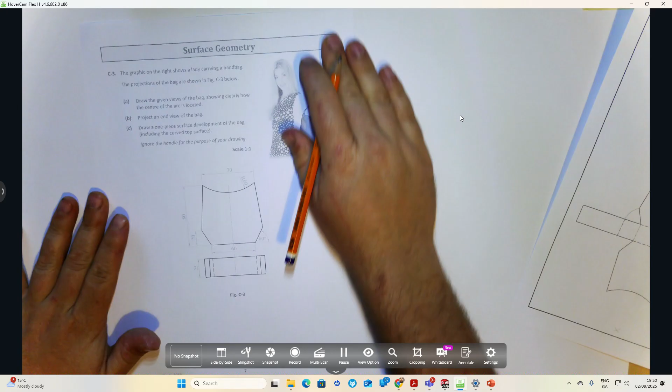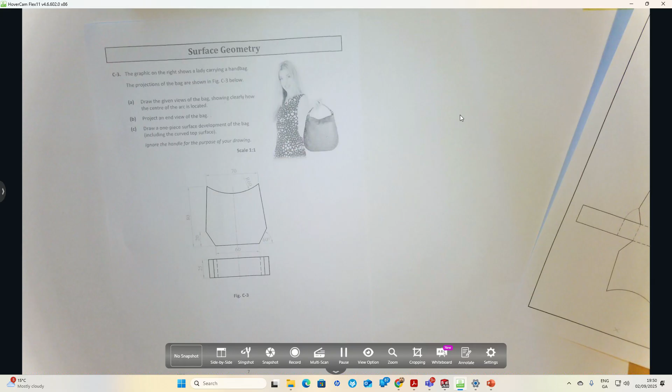Right, so we've got a handbag. Draw the projections of the bag as shown. Draw the given view of the bag showing clearly how the centre of the arcs are located. Project an end view and draw a one-piece surface development, ignoring the handle. So surface development will be folding all the faces of the bag out flat.

Elevation, plan, end elevation, and show how to find the arcs. Right, okay, so we'll begin. Now, so we'll go up here.

There, maybe there on the page. XY line. Okay, center line. Dashed line up through the middle for a center.

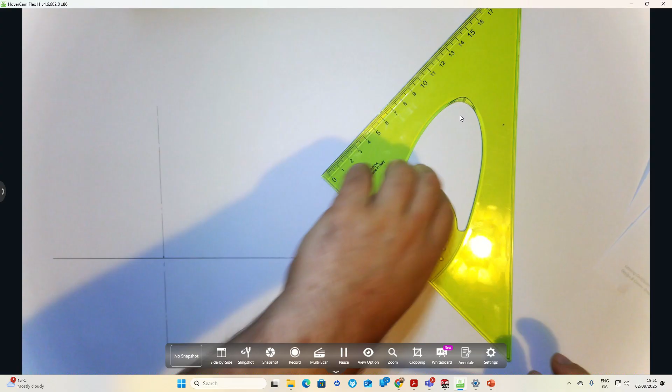Now, okay, size at the bottom is 60 in total, so 30 to the left, 30 to the right. And we can see a 70 for the top, so 35 to the left, 35 to the right.

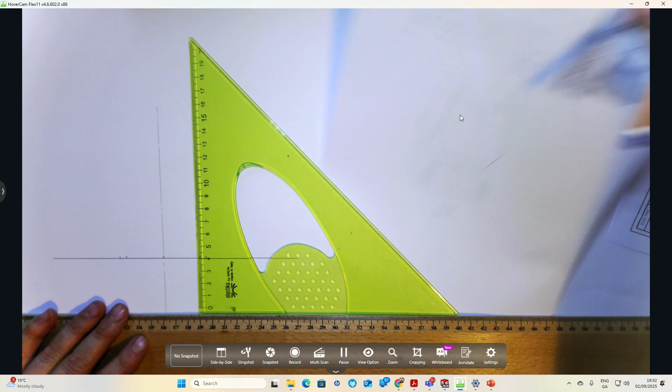We can draw lightly up here with these. Okay, 20 mil for the bottom, so 20 mil up from the XY line, then 80 up from the XY line for the top of the 60 mil arcs.

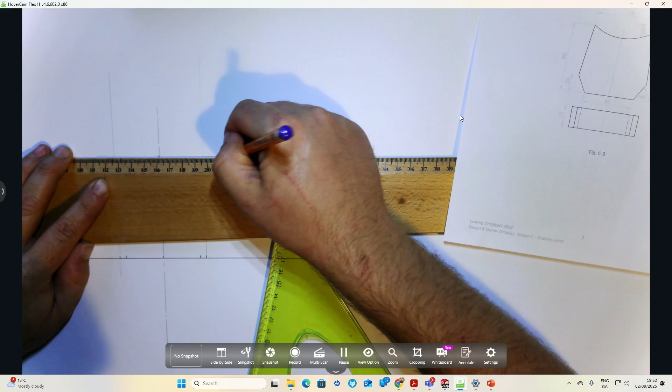So light line across, light line there. Okay, an angle of 60 degrees for the chamfers at the bottom, so an angle of 60 degrees.

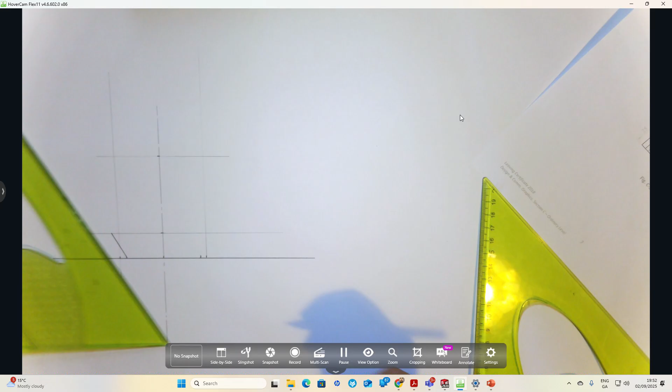So 60. Now, the radius at the top is 60 millimeters. So we've got 2 points in the circumference. So look, we've got 2 points.

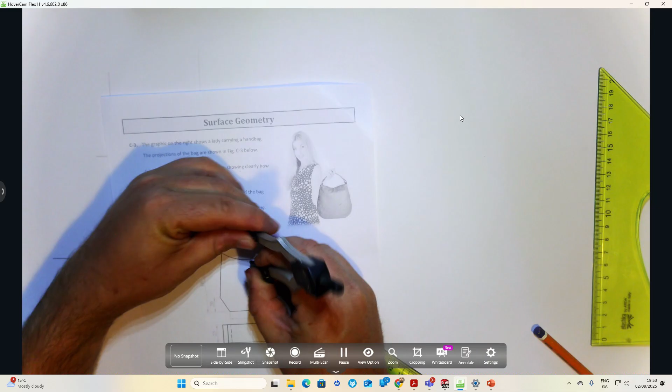So we're going to set our compass to 60 now, just judging this by eye in the question. We're going to swing 2 arcs, radius 60, from these points, and then we've got the center of the arc. So two radius 60 arcs.

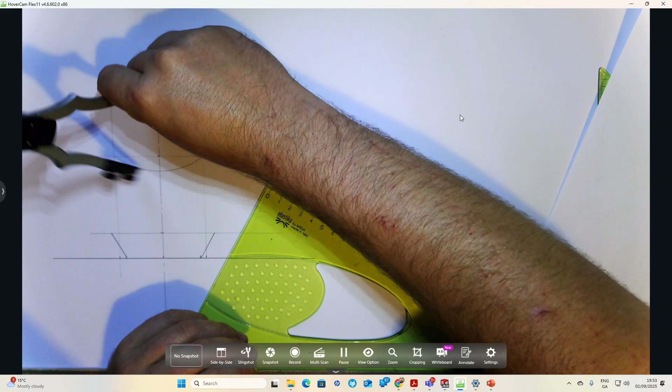So I'm setting my compass to 60 here, and I'm going to swing from this corner here, and this one here. Then we've got the center, so we can put our compass up there, and then we can swing there. Now we can connect them together.

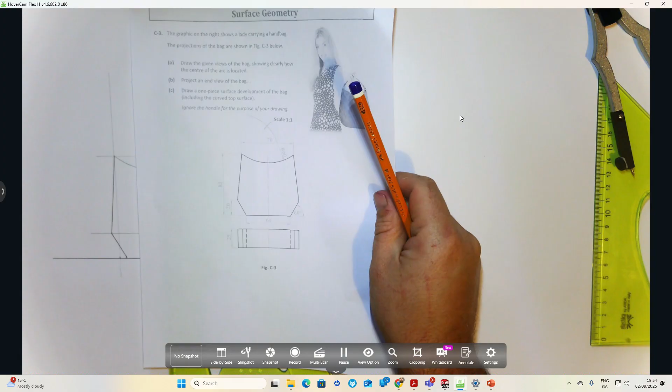Now, plan view. Okay, so we're going to go down 15 mil from the XY line. The total depth is 25, so 25 there. So we're going to project our lines down then.

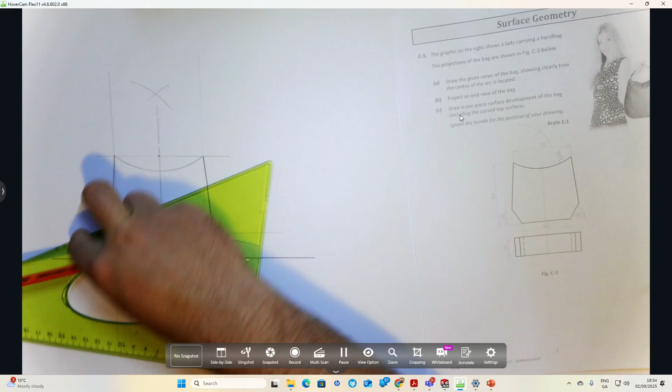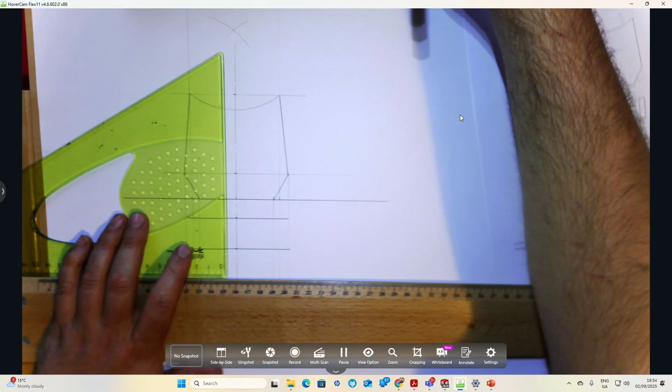Right, so we can heavy across there, across there. Now the bottom there, that's our hidden detail, so hidden detail there. Heavy detail, hidden detail, heavy detail, heavy detail. Right, we've got an end elevation to do.

So I'm going to go across 15 from the corner of the elevation. I'm going to draw a YY line here. I'll do my 45-degree line there.

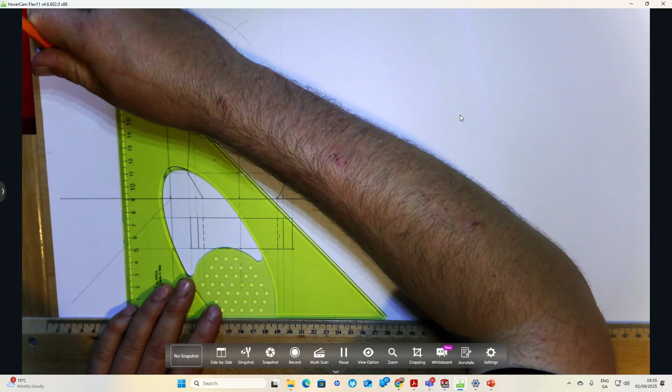I'm going to bring the 25 across to the 45-degree line. Okay, I'm going to go up then from where they hit the 45-degree line, so I'm going up. I can bring these across. So a heavy line there.

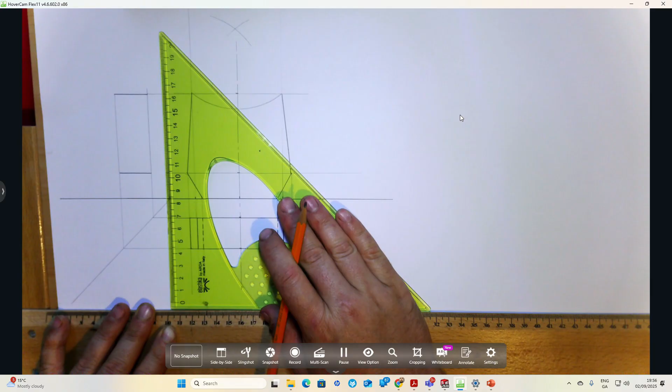Heavy line. Now, so that's part A and B done, the given views and then the elevation. So we have to do, alright, okay, a one-piece surface development, so we have to fold all the faces out.

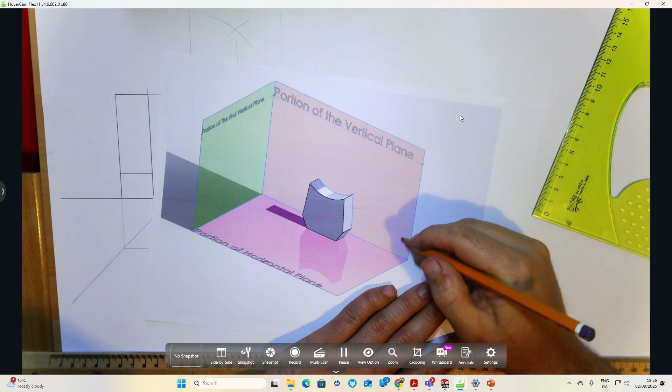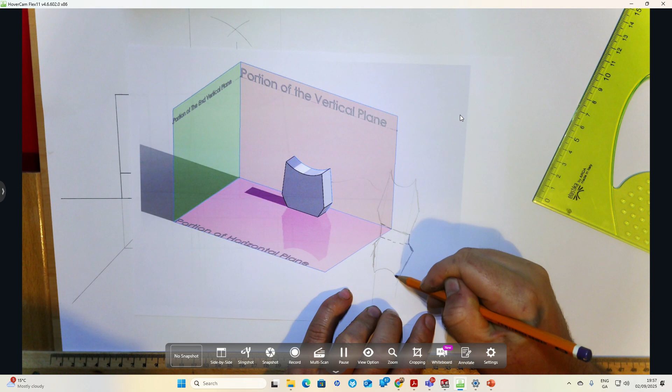So the back face is going to remain the same, then the base on it. Alright, so we have the back and the front face there, and the base. Now the sides, so you could go 1 and 2 there.

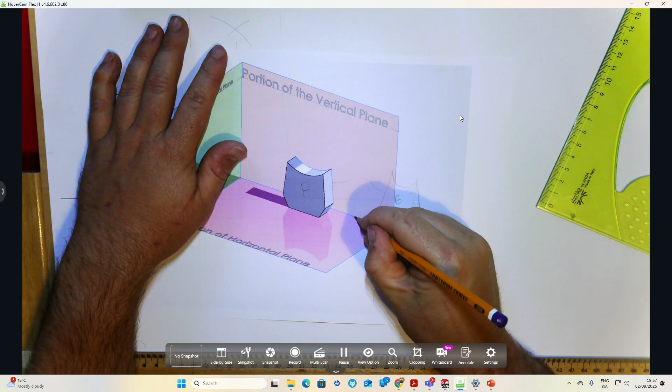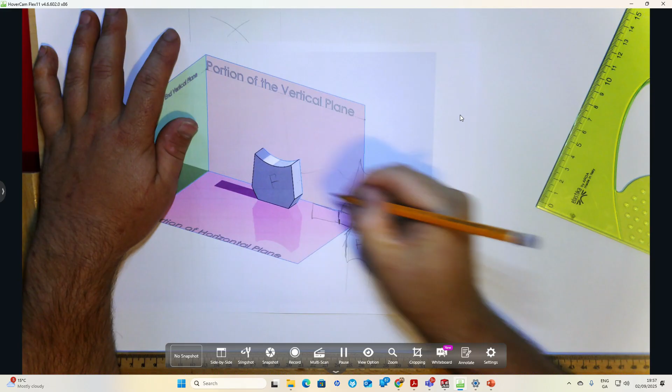So we're putting these faces here, 1, 2, and then we're going to have to divide this up into, okay, 3, to put the curved face in along here, and we'll have 3 elements on. We're going to divide it into 60, 30.

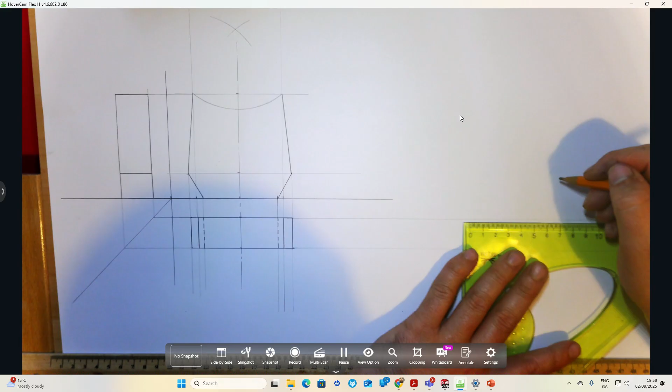So we'll get cracking. Alright, so I'm going to bring across the lines of my plan. Essentially I'm going to redraw an elevation here. So I'm going to put these in. I go out a bit, well, I'll go out a good bit to make sure I have plenty of room. Don't need to see my end elevation for a while.

Okay, so to judge the spaces, I'll be alright. I'll rub out my XY line, or rub a bit of my XY line out if I need to. So 60 millimeters, and then 30.

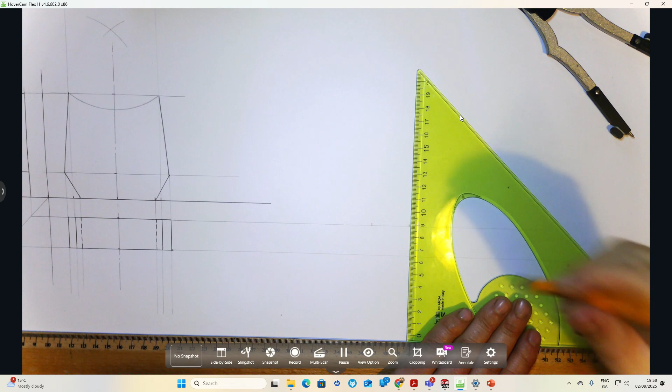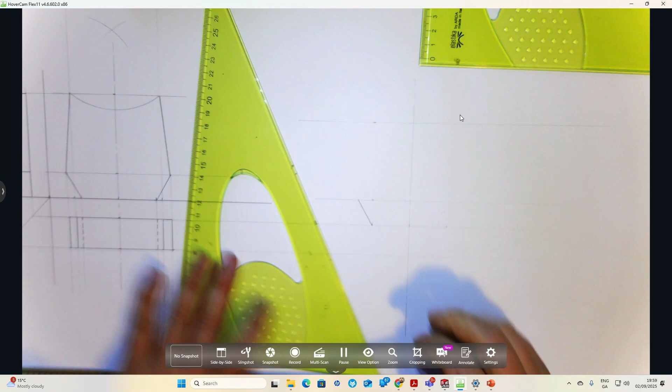Okay, so the same heights again, 20 and 80. Alright, same angles again, 60 degrees. I'm just doing light lines there for the height. So 60 degrees here. Degrees there. Now 70 up at the top.

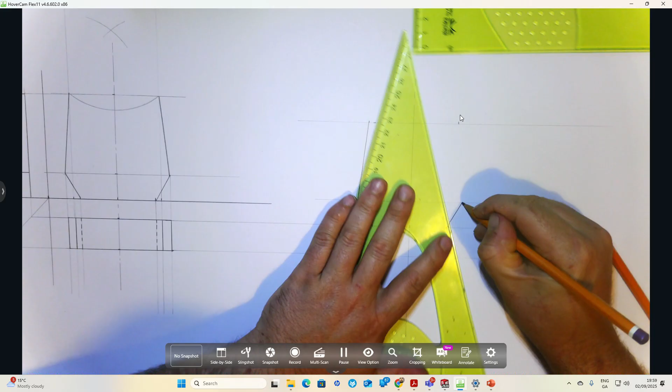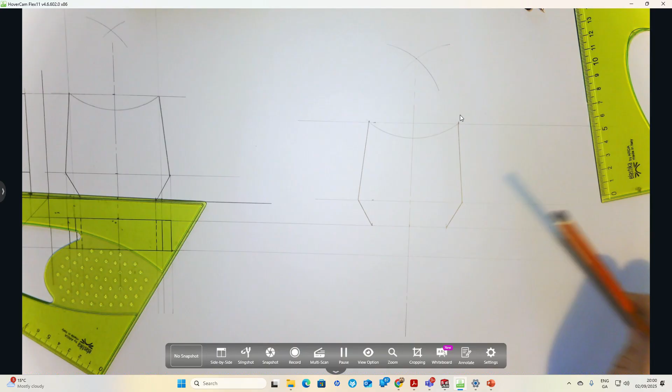Now to get the center, same strategy, so radius 60. Swing an arc up here from the left, swing one from the right, then put your compass up there. There, you can mark it in. Alright, so we're going to project that down underneath then.

So 80 is the height. This compass is set to 60. I'll move it down a bit. Here we go. So we're going to swing an arc.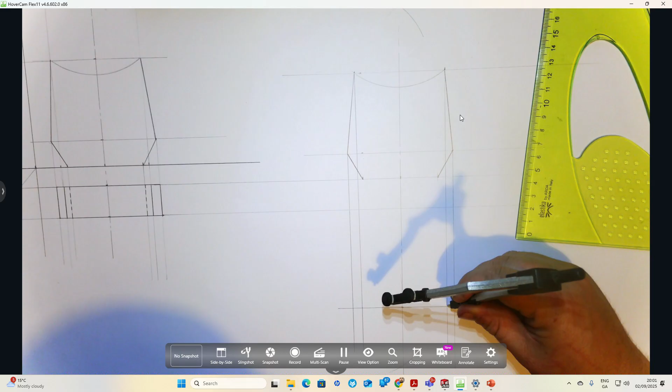Now developments is all about recognizing true lengths, and we have an awful lot of lines as true lengths because we're looking perpendicular to them now. So what was I doing there? 60 from here and 60 from this one here.

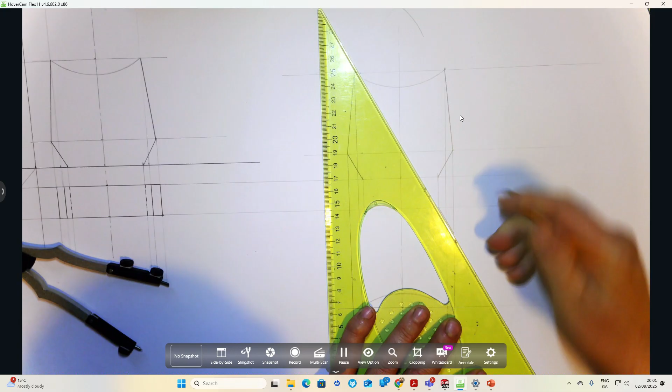There we go. Now then, 60 degrees again. And 60 again, which will get you the altitude of 20.

And we can join these together. Now we're going to fit in dash lines for fold lines.

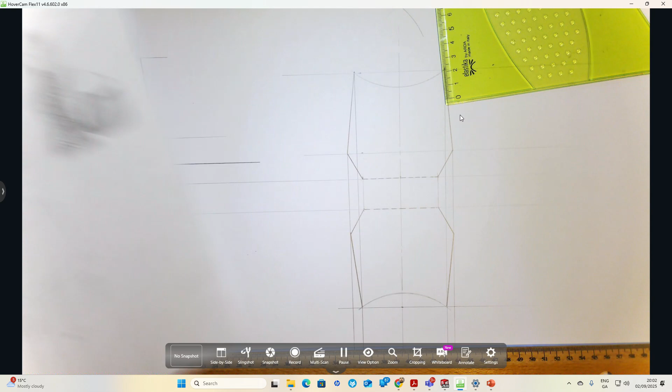Now this line here is a true length in elevation because it's parallel to the XY line in plan. So it's a true length in elevation.

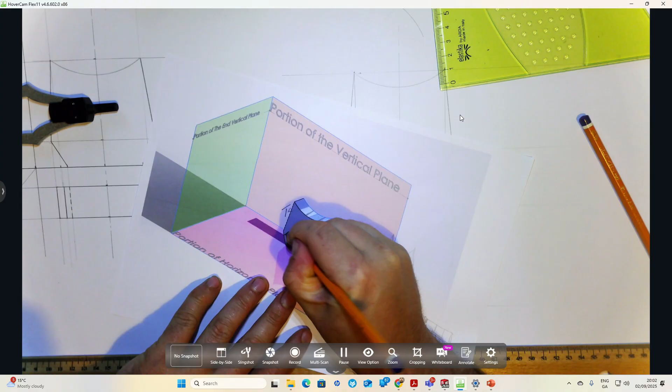So I can go up to my elevation, or I can go from here. Right, so I'm jumping the gun there. Yes, that's the true length, and I meant to do this one first. That's a true length in elevation because it's parallel to the XY line in plan.

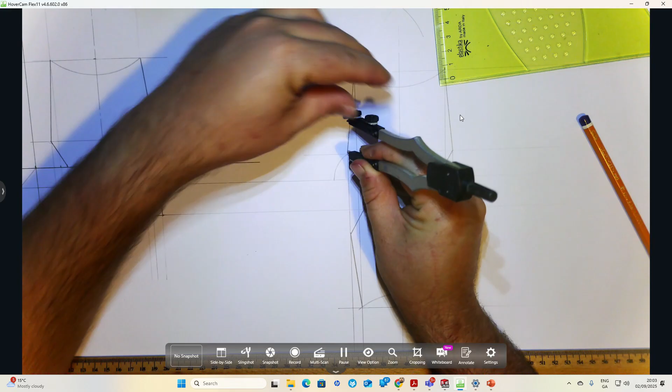I can take this distance with my compass, alright, and I can essentially just swing it down onto that there. Okay, and then I can take this distance with my compass and put it then, so I took that distance, which is the same as taking it from here, rather, and I can add that on here. Alright, now I can heavy those in.

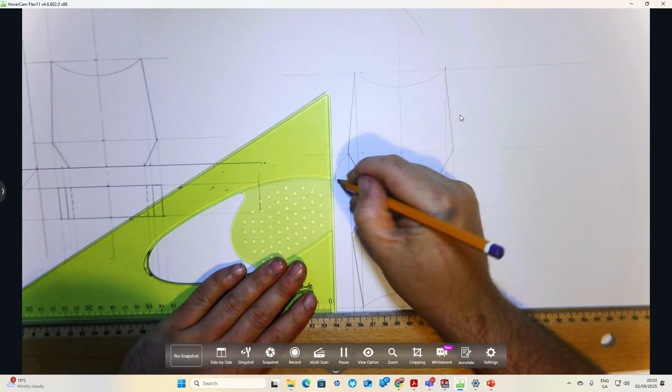And here's a dashed line here, so a dashed line for a fold line, and a dashed line here. And I can heavy that in.

Now I'm going to put 1, 2, so 1, 2 faces along there. So it's the same again.

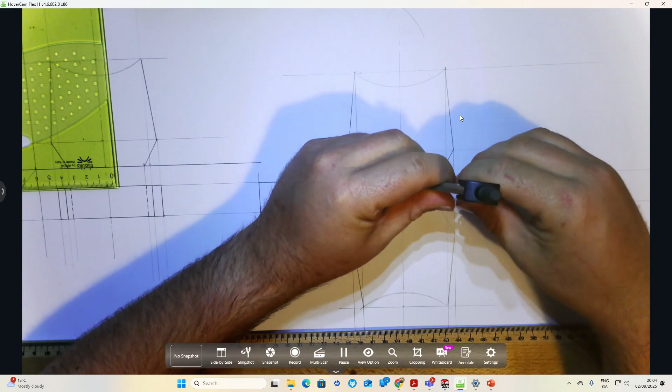Now, if you wanted, you could go from the center here and just swing them over because they're symmetrical. If it saves you time, that's fair enough.

Or you can just take this distance here, bring it down, and then take the next distance and add it on, whatever you want.

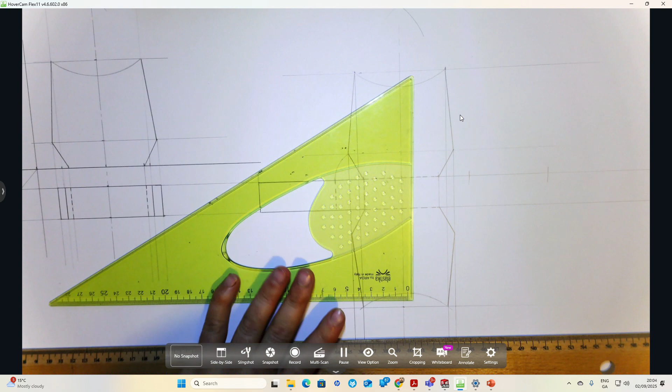Now, finally, we have the curved surface to do. Alright, so we're going to label this 0, and we're going to add in a set of points here. So we're going to go down, we'll say 5 from the top, 5 from the top there.

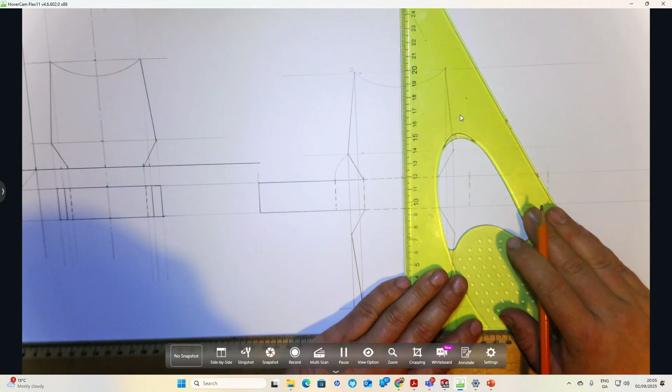Now you can do it up on your elevation there if you want to, or on this face. So we're going down 5 from the top, and we're going to draw a straight line across. So 0, 1, 2, 3, 4.

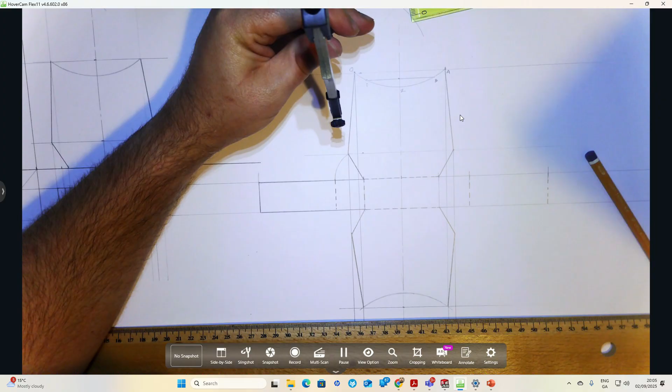Now we're going to take the distance between 0 and 1. I'm actually thinking now about whether I should do this a different way.

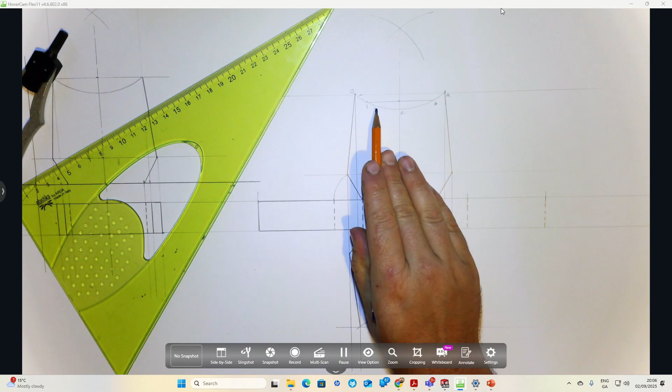So I would rather you do this a different way. We're going to split the angle for accuracy. So I'm going to bring this center line up to where the arcs crisscross, and join the center point to 0. I'm going to bisect this angle up here.

So I'm going to get my compass, set it to any radius I want, and swing 2 arcs. So I was bisecting an angle there. I'm going to put my compass on each of the arcs and swing again, don't change your radius. Now I'm going to join where those arcs crisscross to the apex.

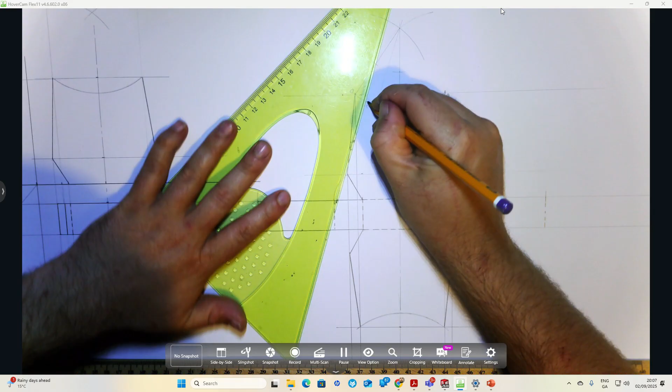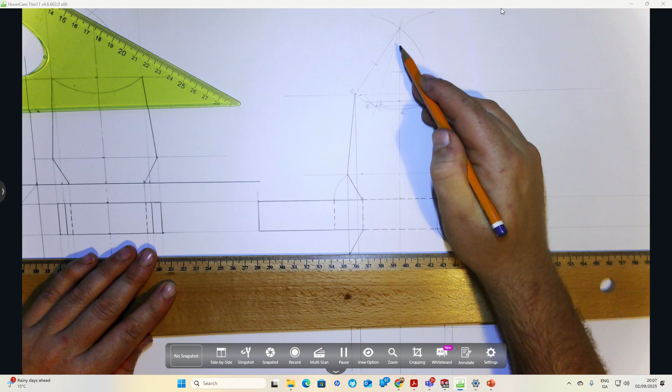Now I'm going to move number 1 there to where that touches the circle. That's number 1, or the arc rather. Now I'm going to draw that straight across, and where it touches the arc, that can be number 3. So essentially that line is invalid now. I bisected the angle just to get it accurately in the middle.

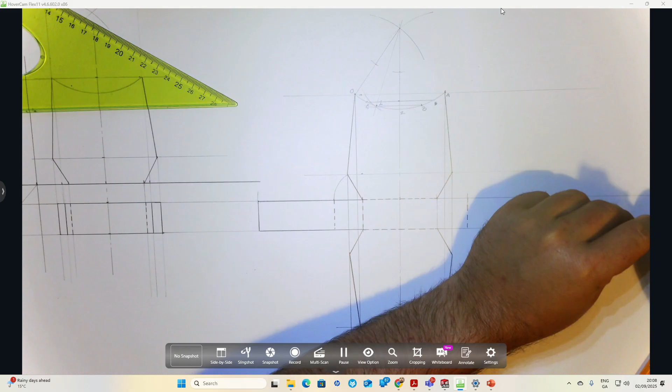Now we're going to take this distance with our compass, the distance 0 to 1. There's 4 divisions: 1, 2, 3, 4. So I'm going to step this: 1, 2, 3, and then 4. So I set my compass to 0 to 1.

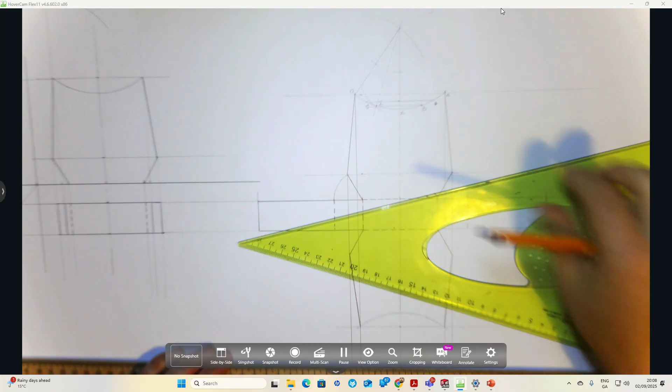Remember, I bisected the angle. If you didn't, you'd have to go 0 to the first mark I'd done, and then back to the second, and you'd just be messing around changing your compass. It's quicker if you just divide it in half, then split the half into a half again, so you divide it into a quarter. Then we have our elements here.

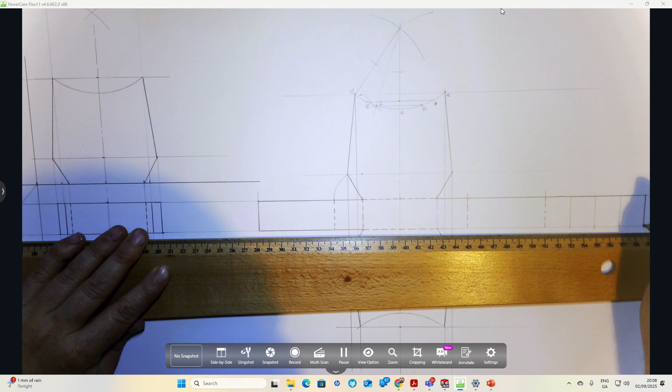And the last heavy line. And we can bring that back. A dashed line here.

That's the question done. Right, thanks very much.